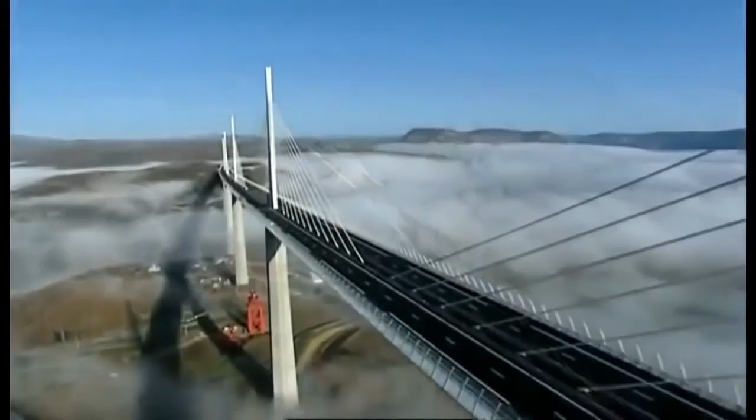This is the Millau Viaduct, the tallest bridge in the world. Its highest tower stretches a staggering 343 meters. So high, the bridge glides above the clouds. But this is a megastructure they said couldn't be built. When I've shown first the drawing of this bridge, they really thought I was crazy.

The team attempting to build this amazing freeway in the sky had to survive landslides, fight winds gusting at 130 kilometers an hour, and weather massive storms as the bridge simply hung in the balance. It's a bridge that pushes the boundaries of engineering to the limits, and then beyond.

Imagine building a series of Eiffel Towers, then slinging a 4-lane highway between them, all the way across one of the deepest valleys in France. Impossible though it sounds, that pretty much describes the building of the Millau Viaduct.

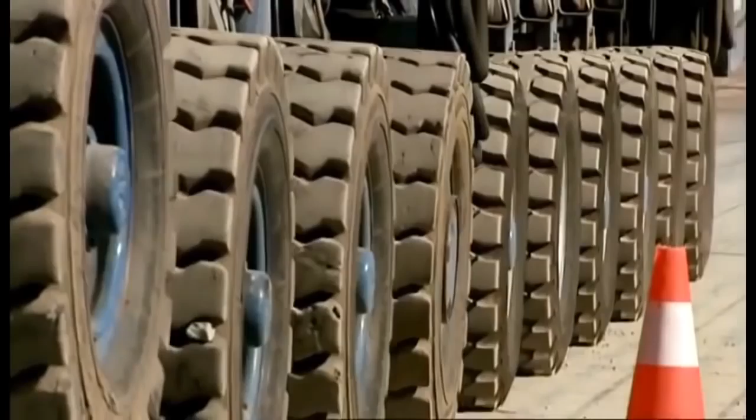From the start, the construction team faced 3 daunting challenges. 1. Build the tallest bridge piers in the world. 2. Put a 36,000-ton freeway on top of them. And 3. Erect 7 steel pylons, each weighing 700 tons.

And what's more, they had to do this hundreds of meters above solid ground. So high that if you were on top of the Eiffel Tower, you'd still be looking up at this awesome bridge.

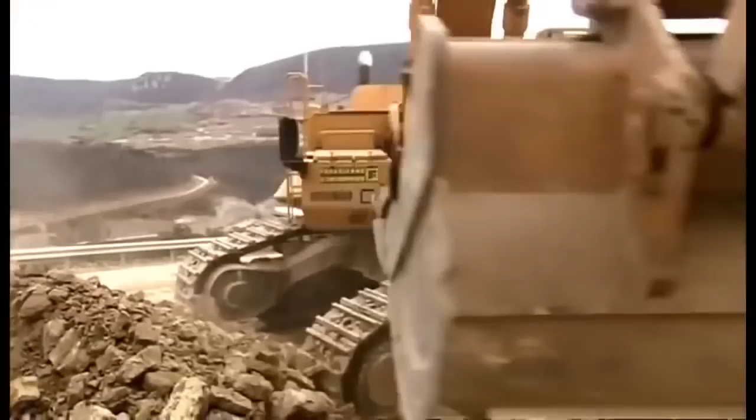October 2001, the team break ground. They're required to build a bridge that'll last for 120 years. And to win the contract, the teams promised to build it in record time, less than 4 years. By comparison, the world's longest suspension bridge, the Akashi Kaikyo in Japan, took a full 10 years to build.

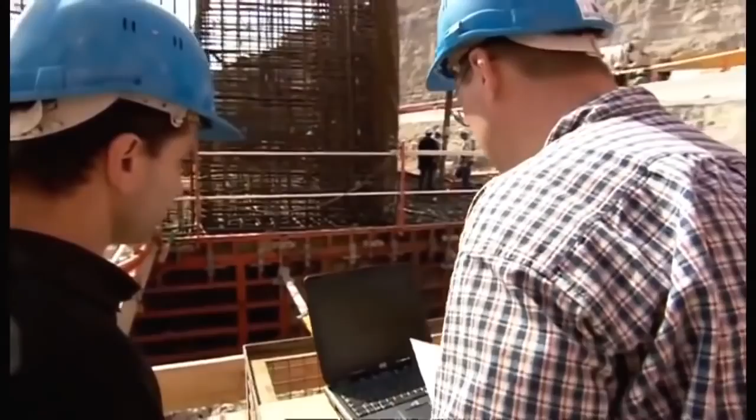To up the ante, any delay will cost them $30,000 a day in penalties. There are 7 piers that are numbered from the northern end of the valley. Number 1 will pose problems because of the steep slope. Number 2 will be the biggest challenge since it's the tallest. Crossing the river, number 3 is not much shorter. Then 4, 5, 6, and 7 climb the gentler slope to the south.

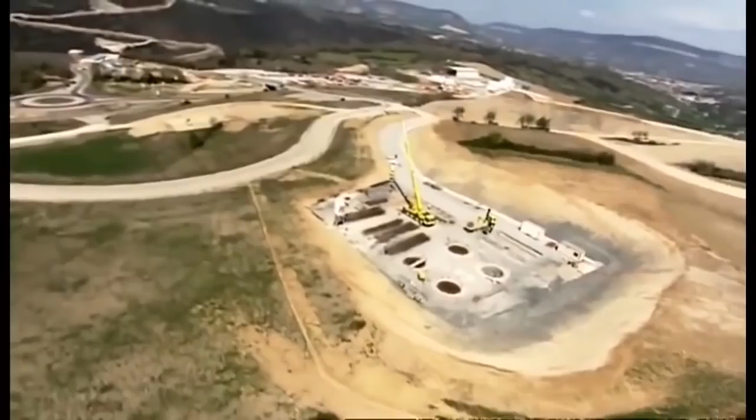To begin, the team had to bury the foundations deep in the bedrock in order to support the enormous weight the bridge will place on them. But the forces of nature were stacked against them. Geologists have warned of the risks posed by the region's fractured limestone. The rock is full of cavities that are essential to the local cheese economy.

These cave systems, close to Millau, are home to a unique bacteria responsible for the blue mold in the world-famous Roquefort cheese. But what's perfect for cheese could be disastrous for a megastructure. The geologist's diagnosis spelt one thing: landslides. This kind of catastrophe could jeopardize the entire project. Despite the warnings, building went ahead as planned.

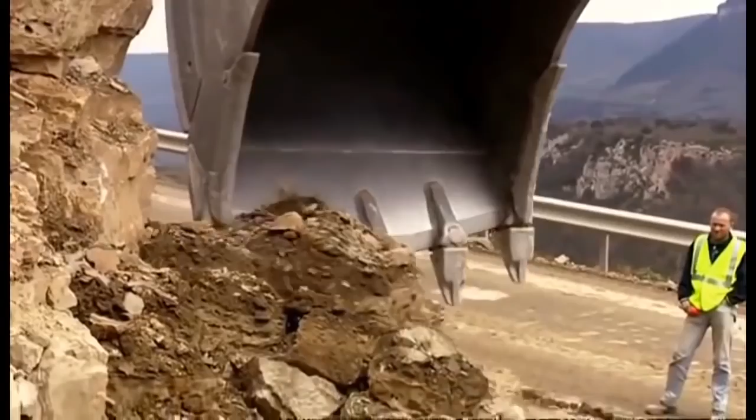Then, well into construction, as predicted, a dramatic storm causes a landslide. 4,000 cubic meters of rock collapse around Pier 1. Fortunately, the fallen rock doesn't damage the pier, but the warning is clear. They're forced to divert precious manpower and equipment to stabilize the slope and prevent a repeat collapse.

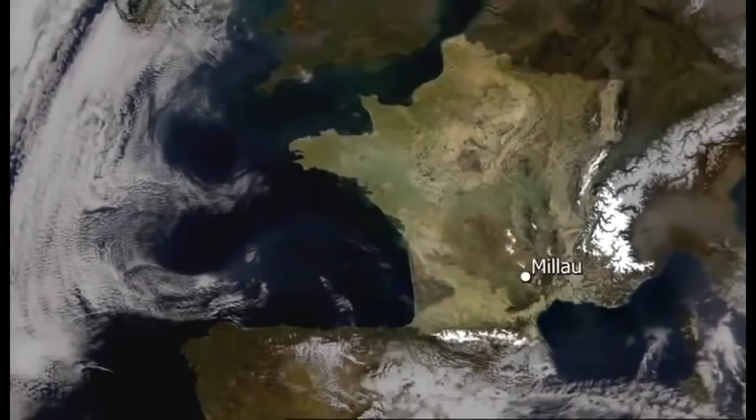So if the area is prone to landslides, why did they build the world's tallest bridge here in the first place? The answer is simple. In the 1980s, France built a freeway linking Paris directly with Spain. This major artery headed south across the French countryside, while from the Mediterranean, the freeway headed north, until they both hit one of the deepest valleys in France and stopped dead.

Welcome to Millau, France's least favorite bottleneck. The town of Millau is in the mountainous region of the Massif Central, one of the most tranquil parts of France. But in summer, this poor medieval town suffered traffic hell. The locals couldn't take it anymore. Neither could their mayor.

It was terrible for our reputation. When you hear every day on the television and radio, avoid Millau, there's a traffic backup, a 5-hour wait in Millau. And it's not just the people of Millau.

Two drivers, Jamila and Jemima, crossing the 30-odd kilometers between the freeway on either side of Millau, reveal exactly why this bridge is needed. Jamila, in car 33, will cross the new bridge, while in car 22, Jemima will take the old road across the valley floor.

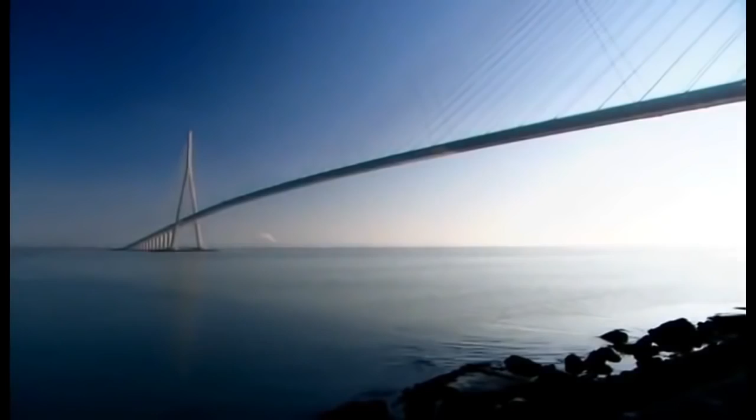It's clear exactly why the bridge was needed, but it took the French government a very long time to get round to building it. 12 years before construction began up in Paris, the Ministry of Transport first came up with a plan. Their head bridge builder, Michel Virlogeux, is no ordinary engineer. He's a man who thinks big, very big, like the Normandy Bridge in northern France, the longest cable-stayed span in the world.

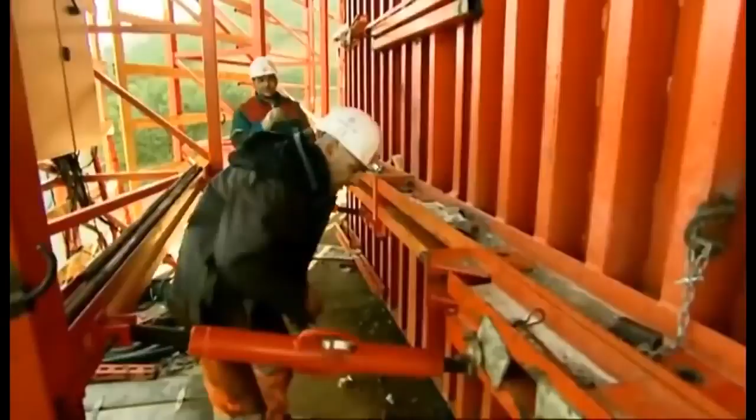With this record-breaking structure completed, Virlogeux was on to his next, Millau. His plan, another cable-stay bridge, but pushing the technology beyond anything previously attempted, with piers 4 times higher than the Normandy Bridge. The Millau Bridge would not only be the world's tallest, it would be unlike any bridge ever constructed. When I've shown first the drawing of this bridge to the competent authorities, they really thought I was crazy.

Virlogeux's Normandy Bridge has 2 sets of cables supporting the deck. But he wanted to up the stakes for Millau by losing 1 row of cables, so the remaining line would be forced to do twice the work. More dramatically, the 2.5-kilometer Millau Bridge, instead of having a single main span, needed a whole series of piers to support it across the valley. No bridge builders had ever attempted a multiple-span, single-line cable-stay bridge on this scale before.

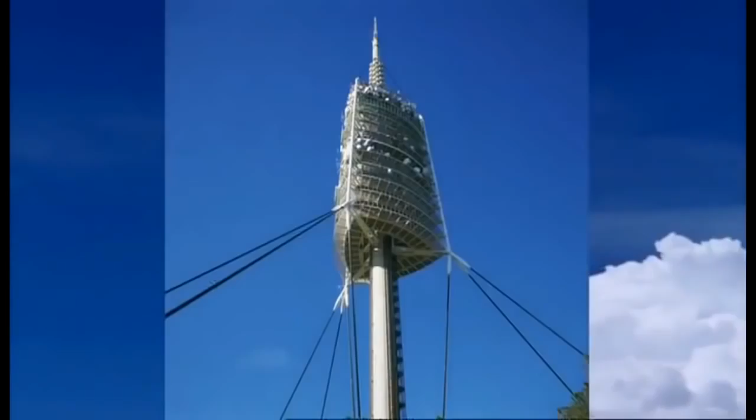The French authorities had a problem. Nervous about Virlogeux's groundbreaking scheme, they held a competition inviting other engineers and architects to compete with different designs. The winner, Lord Norman Foster, is one of the world's superstar architects. In Hong Kong, he built the world's largest airport terminal. In Barcelona, offices literally hang from a mast on his communications tower. This is a man who regularly contemplates the impossible and delivers. You know, it's the challenges, and it's one challenge on top of another, on top of another.

And with Millau, one of the biggest challenges was making it fit into the landscape, given it's just down the road from the famous Gorges du Tarn, France's equivalent of the Grand Canyon. How do you make something which has to be so immensely strong against the forces of nature look very gentle, very delicate? How do you weave something on that scale into the most unbelievable landscape?

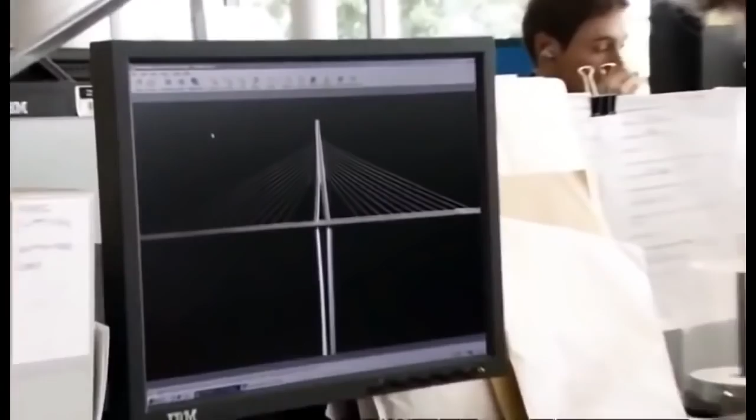Ironically, Foster's answer was to take Virlogeux's pioneering scheme, then push it one stage further. He turned an elegant piece of engineering into a delicate work of art by boldly cutting out 2 of the 9 original piers and seriously slimming down the remaining piers and road deck. Foster wanted the bridge to appear as delicate as a butterfly, but this butterfly has to support the weight of 5 Eiffel Towers in gale-force winds hundreds of meters above the River Tarn. Getting the design wrong would be a disaster.

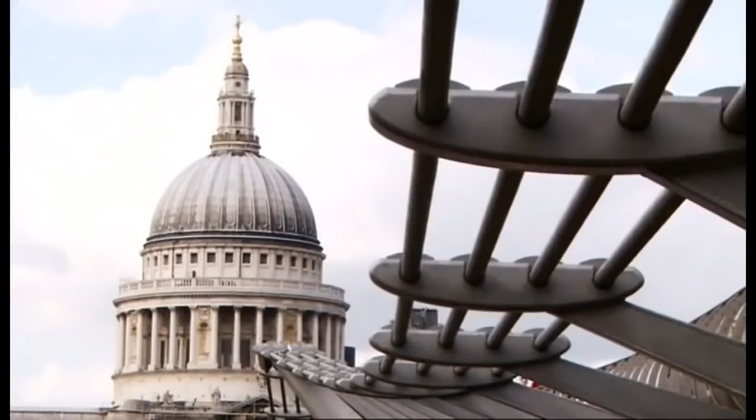Then, with Millau still on the drawing board, Foster's record as a bridge builder suffered a major setback. His Millennium Bridge in London is actually another record-breaking structure, the lowest profile suspension bridge in the world. But when this footbridge opened to the public in June 2000, it was a public relations disaster. Crowds walking over it set up a resonant frequency, and the bridge began to sway. As people adjusted their step to the small initial wobble, the effect was magnified.

Though it didn't threaten the structure, the swinging motion became so dramatic, the authorities closed the bridge for a refit that took 1.5 years and ended up costing over $8 million. It was a bad omen for the Millau Bridge, where construction was soon to begin. And at 15 times the height, a design flaw would be a catastrophe.

December 2001, France's Millau Viaduct, the tallest bridge in the world, is under construction. Everything about this project is supersized. It'll need 200,000 tons of concrete, so much that the team have to build a concrete factory on site. But there's nothing straightforward about this concrete. The formula must be just right.

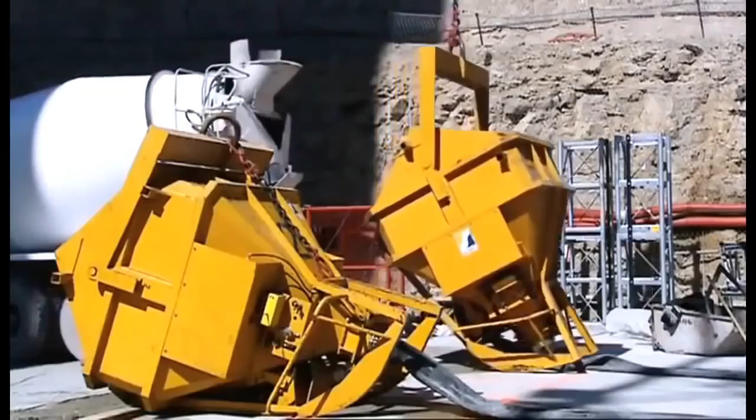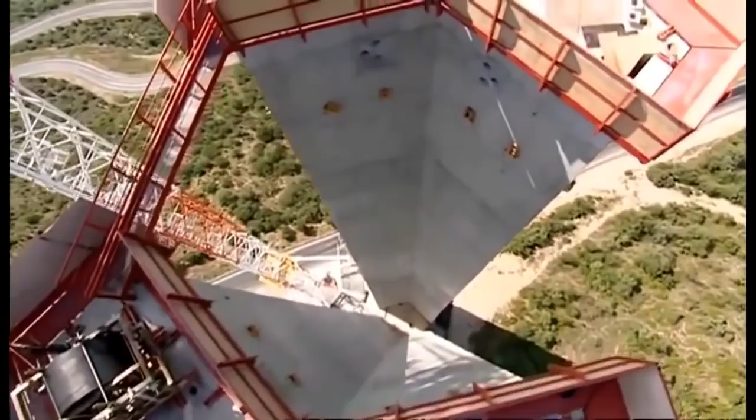It needs structural strength to support the massive loads it'll have to bear. But it can't set too quickly, as it has to be hoisted into position and poured hundreds of meters in the air. And it needs to be just the right color to suit Norman Foster's vision. In fact, the architect's vision has created a headache for the construction team. He's designed each pier as a complicated geometric shape, tapering the entire way up with vertical grooves set into them to create shadows. But what's just a line on paper for the architect was a major challenge to build.

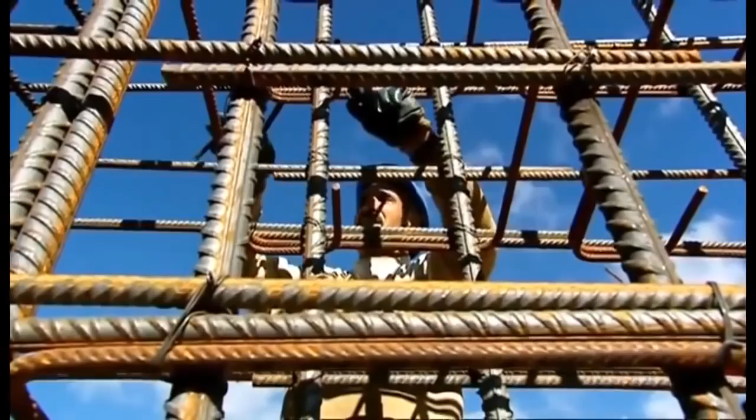The enormous piers are built step by step by pouring concrete into a temporary mold. To give the required strength, the molds are filled with a frame of steel reinforcing bars. In total, 16,000 tons of these steel bars are hoisted into place and secured. Laid end to end, they'd stretch the 4,000 kilometers from Millau all the way to Central Africa.

The shape of each pier is seriously complicated. As a result, each time they remove the sections of red steel shuttering, they have to change the shape of the mold to fit the profile of the next 4-meter section. Manhandling these steel panels weighing up to 15 tons apiece is no picnic. And with the combined height of the 7 piers totaling well over 1 kilometer, they have to change the shape of the mold over 250 times.

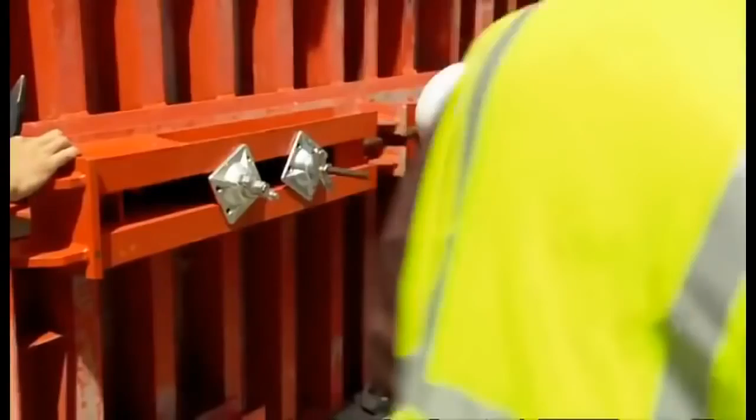Every 3 days, each team on each pier went through this whole cycle. Then they repeated the process. But it was a race against time, with a permanent threat of delay. Keeping the entire build on time and to budget was the daunting responsibility of one man, Jean-Pierre Martin. If instead of 3 days we took 4, imagine that multiplied by the number of castings. We'd end up with a 3 or 6 month delay. With a penalty of nearly $1 million a month, this isn't something Martin wanted to contemplate.

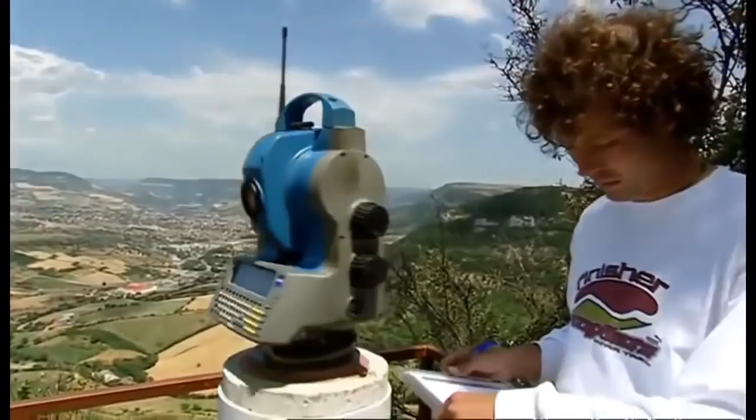And this schedule wasn't his only headache. You have to be pinpoint accurate when you're building the tallest bridge piers in the world. Get it wrong, and the bridge simply won't fit together. Just 10 centimeters out, about a hand's width on each 4-meter section, and the tallest pier could be 6 meters off at the top, the width of a jumbo jet fuselage.

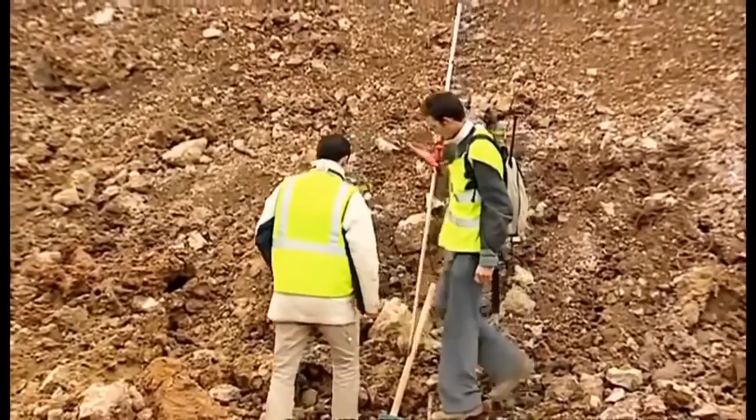Each team was aiming for a specific point in the sky. For Pier 2, this was exactly 245 meters above the ground, 546 meters from the north side, and 1,914 meters from the southern end. There was no room for error. The only chance they had to get it right was with GPS, accurate to within 4 millimeters. Using signals from multiple satellites, the team could pinpoint their position and make sure they're on target for that critical point in the sky they needed to hit.

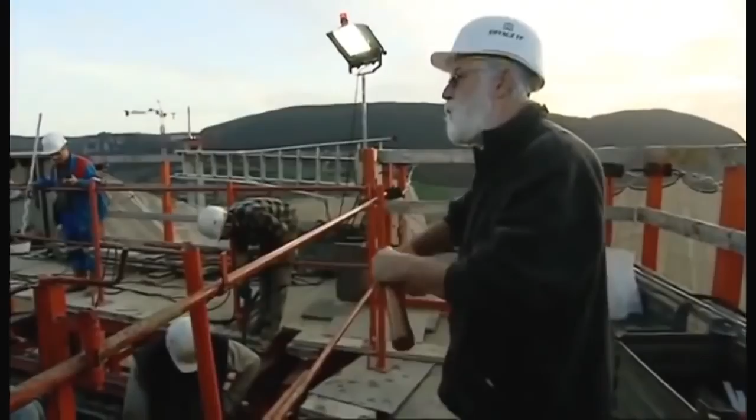Month after month, the piers climbed higher. Finally, by November 2003, they reached their full height. At 245 meters, Pier 2 becomes the highest bridge pier in the world. But is this record-breaking pillar where it's supposed to be? Amazingly, it's dead on target, to within 2 centimeters. Champagne corks pop. It's time for a major celebration. Against all the odds, they were 1 month ahead of schedule, but the team couldn't afford to relax. The next stage of the project would be the most difficult part of the build.

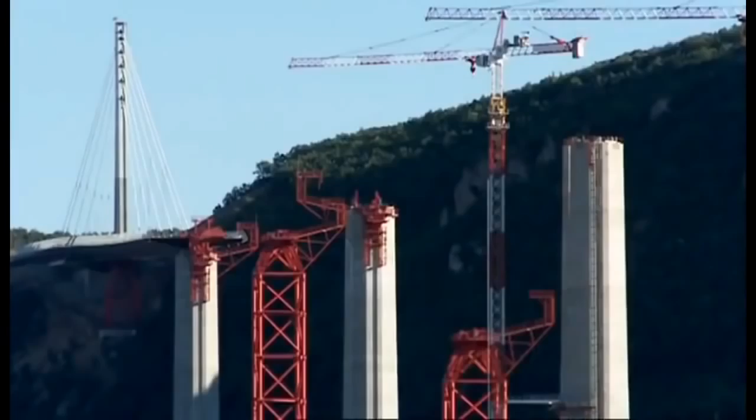Phase 2 of building the world's tallest bridge involved putting a 2.5-kilometer roadway weighing 36,000 tons on top of the piers, a full 270 meters above the River Tarn. Bridge builders know danger comes with the territory, but working at these heights can be lethal. More than 34 died constructing New York's Brooklyn Bridge. 35 died in 1970 on the Westgate Bridge in Melbourne, Australia. And 1 year later, 13 workers were killed when the Koblenz Bridge in Germany collapsed into the Rhine.

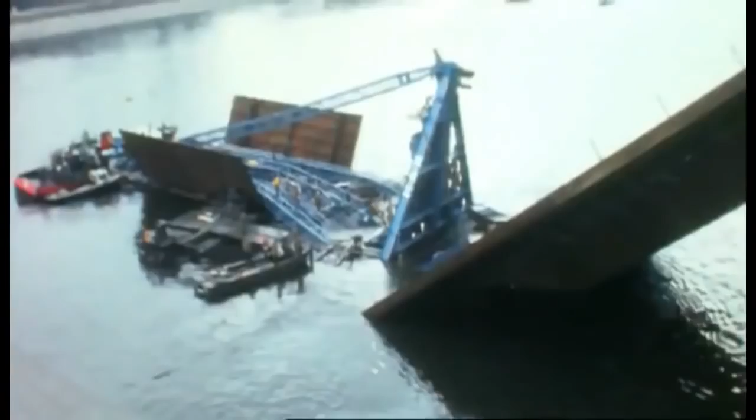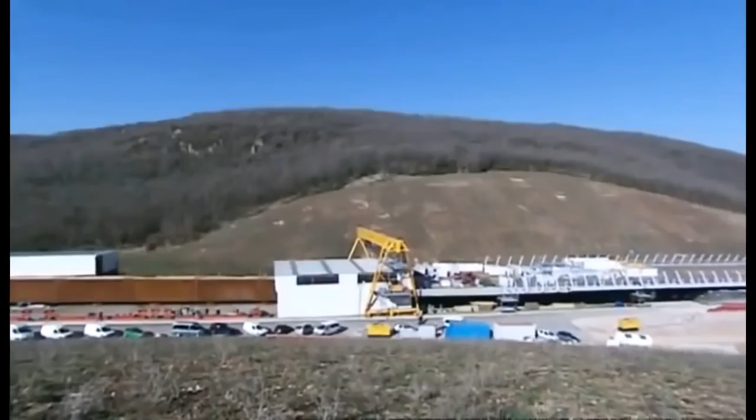With these fatalities in mind, the team decided to fabricate the entire road deck on the safety of solid ground. This meant building it in steel, which in theory would be much safer than lifting vast concrete sections hundreds of meters into position. There's only one problem with this plan. No one had ever put a road deck on piers anything like this height before, let alone over a 2.5-kilometer span.

In the end, only one steel manufacturer had the courage to take on this colossal challenge. Eiffel, the steel firm set up by the great French engineer. Eiffel built what was once the tallest bridge in the world, the Garabit Viaduct in southern France, before getting round to the framing for New York's Statue of Liberty and, of course, his signature tower in Paris. But despite the company's experience, Eiffel's director, Marc Buonomo, knew he was taking a serious risk. It was a gamble for the company, because if there had been a mistake, if it hadn't worked, it would have been the whole company.

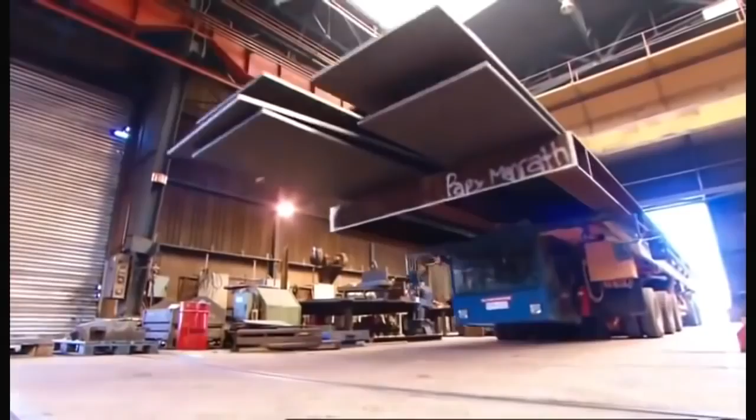They fabricated the massive sections that would make up the road deck in the company's steel factories. This immense jigsaw puzzle involved manufacturing 2,200 separate sections, weighing up to 90 tons and some of them 22 meters long. Their accuracy is measured with a laser to within a fraction of a millimeter.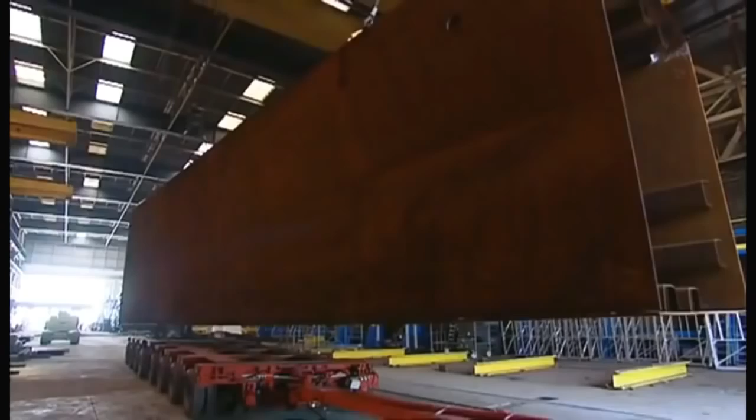The huge square tubes are the central spine that should make the deck rigid. The triangular side panels will be welded on either side to create the width for a 4-lane highway. To meet the punishing schedule, Buonomo automated the manufacturing with a 2-headed welding robot and a plasma cutting machine.

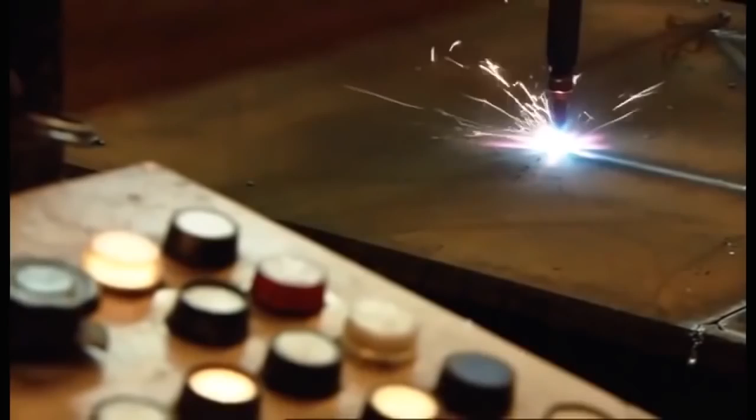Each cutting pattern or template is programmed into the computer. Then the machine automatically blazes its way through the steel. The torch reaches a scorching 28,000 degrees centigrade. That's 5 times the temperature of the Earth's inner core.

But cutting and welding was the easy part. The hard part was getting these monster sections the hundreds of kilometers from the factories to Millau. The routes had to be planned with precision to avoid major damage. The police coordinated safety and clearances. Even with that level of preparation, some obstacles felt as if they're cutting it just too close for comfort.

And this was no one-off event. To build the viaduct took over...

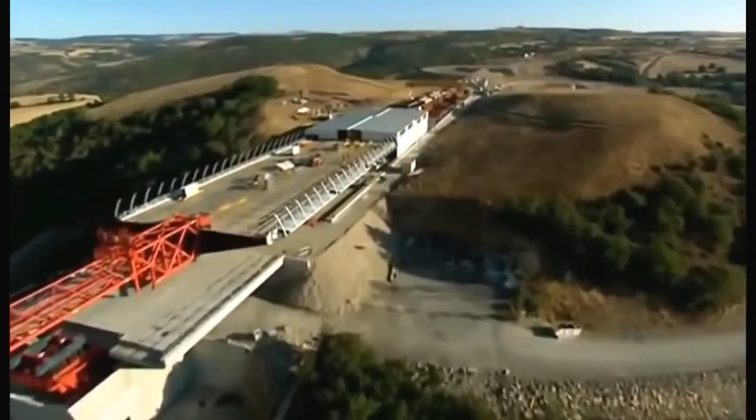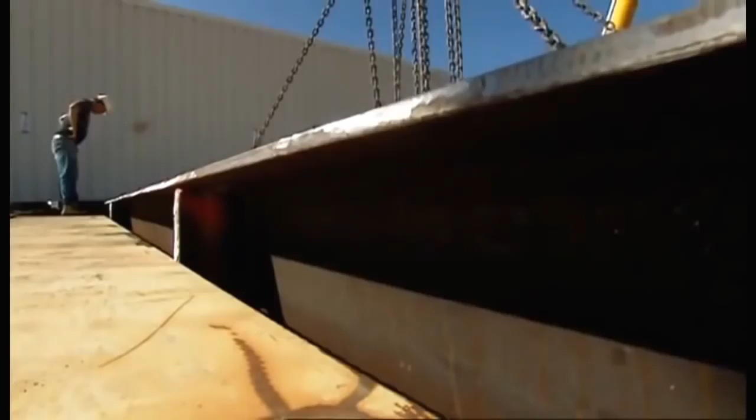Extraordinary road convoys. The components arrived at assembly plants set up, one on either side of the valley. Here, the pieces of a massive jigsaw puzzle were welded together to form the 2 halves of the deck. But getting these 2 halves to span the valley, on top of the world's tallest bridge piers, would be a major challenge. They'd be the first team to put a road deck on a pier taller than an 80-story skyscraper.

And pushing bridge building beyond anything attempted before, they planned to slide the entire 2.5-kilometer road deck over in 2 colossal pieces. The bridge's chief engineer, Jean-Marie Cremer, was one of the few people who believed it could be done. All the engineers who know this method, who were in the know, didn't believe it was possible. If the team had got their calculations wrong, the entire structure could collapse into the valley.

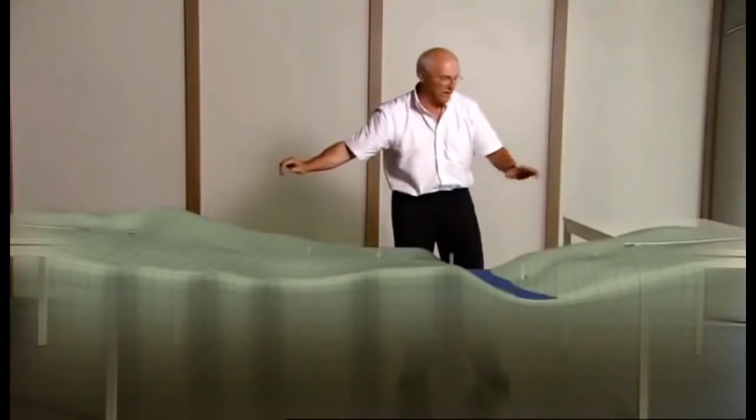We found a solution for the construction, which was to launch the bridge from the 2 sides. One part on the Larzac Plateau, one on the Rouge Plateau. And to push them from the 2 sides and to make them come and meet here above the River Tarn.

Smaller bridges use a similar technique. A powerful set of hydraulic rams literally pumps the deck from one side to the other. But Millau would be the longest launch ever attempted over the highest piers in the world, and the results could spell disaster. The deck is so slender, it would bend and collapse if it were pushed out over the 342-meter spans between each pier. The furthest anyone's previously managed is less than half that distance.

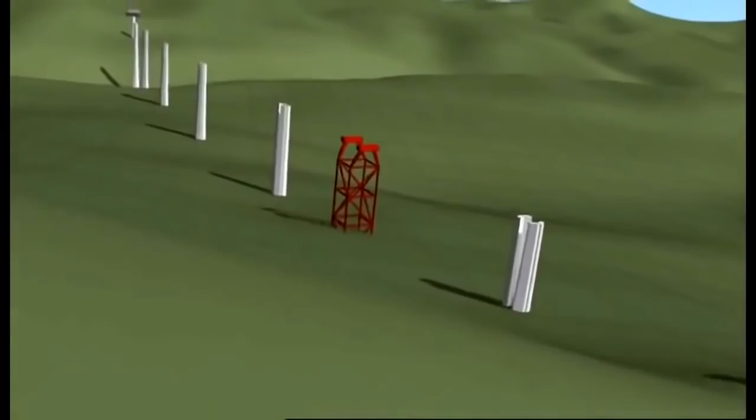The first part of the solution was simple. Fit a pylon so its cables support the front of the deck as it goes out over the valley. Then construct temporary steel support towers that halve the spans to a more manageable 171 meters. These steel towers were a construction feat in themselves. The largest, over 170 meters high, is the tallest ever built, and they needed to carry a massive load.

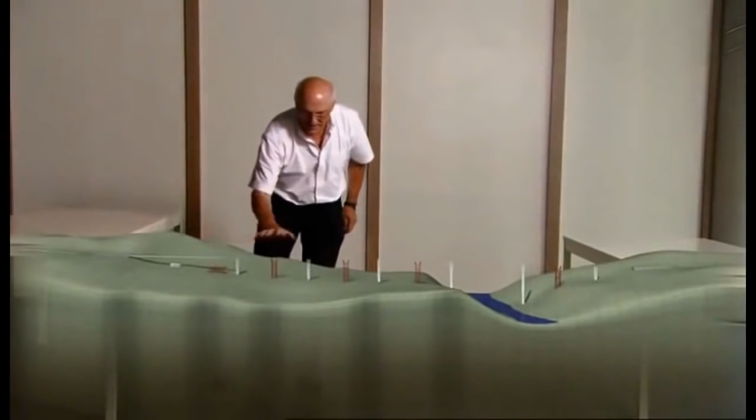7,000 tons as the leading edge of the deck, together with the first 90-meter pylon, slide over. And simply pushing this enormous weight over the top of the vulnerable piers would bring them crashing to the ground. This was the nightmare scenario. If we'd done a conventional launch, we would have knocked the piers over like the pins in a bowling alley.

Someone needed to reinvent the way this type of bridge is built. And it's Marc Buonomo with Jean-Marie Cremer who came up with the breakthrough. The basic principle can be demonstrated with a heavy box and a wobbly table.

With a normal launch, you knock over the piers. I want to advance the deck over the pier, but if I push the deck from here, I'd knock over the piers. Because they're so tall.

The idea is to install a launching system on top of the pier, and that way, if I push the deck, it has no effect on the stability of the piers, and the piers won't fall over. The trick is to use a series of these launching systems to jack up the deck and inch it forward.

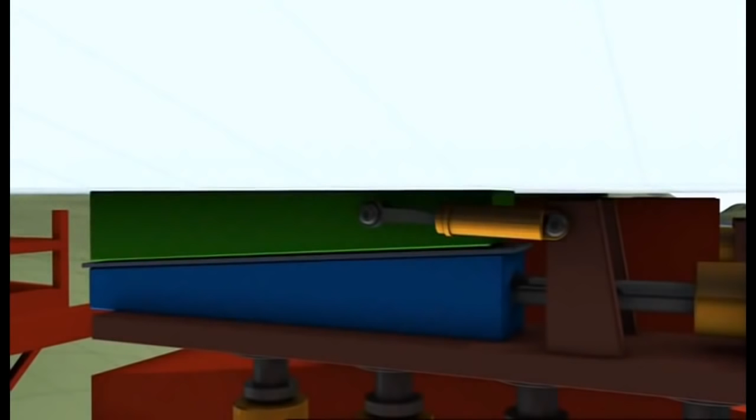Each system uses two wedge-shaped blocks under each side of the deck. The upper wedge is pulled forward by a hydraulic ram. It slides up the slope of the lower wedge at the same time, lifting the deck from its supports and advancing it 600 millimeters. The lower wedge then retracts, dropping the deck onto its supports. The upper wedge returns to its original position, and the whole cycle begins again.

4 of these clever devices are placed on each pier, all programmed to work at exactly the same time. The result is that together, they pick up the entire roadway and shunt it forward. But if one fails or gets out of step, it could spell disaster. The force could push the bridge piers apart till they collapse.

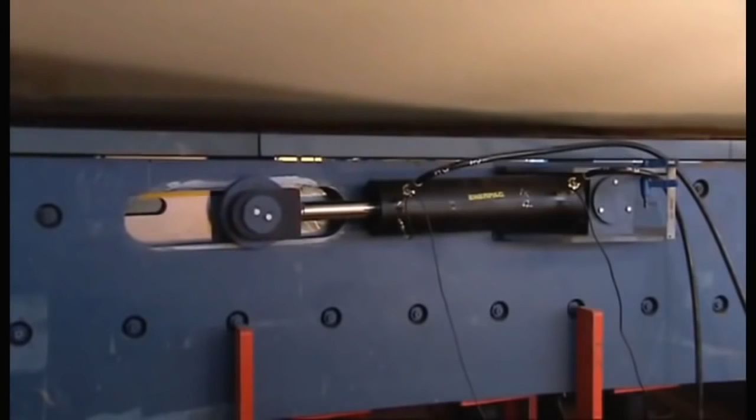When you're up there and you see Millau 300 meters below you, you ask yourself, was this a good idea? The future of the entire project was now hanging on a prototype, and it had never been tested.

It's the morning of February 26, 2003. Do or die day for the world's tallest bridge. Everything is about to be put to the test. The flexibility of the deck, the strength of the temporary piers, and critically, the pioneering hydraulic ram system. Even Boineau, the man in charge of the launch, had his doubts. As it had never been done before, I have to tell you, I had fears that it wouldn't work.

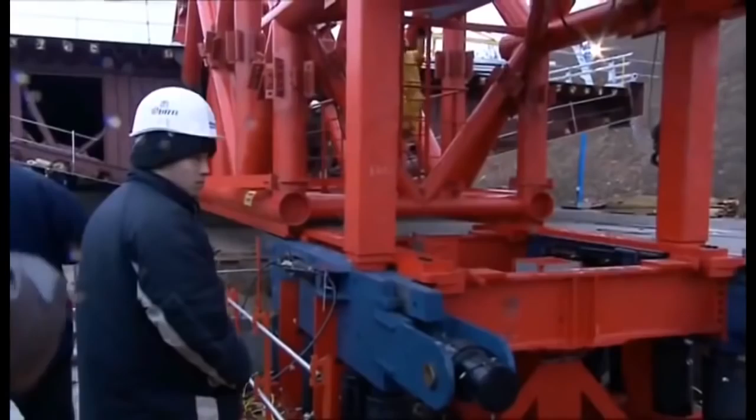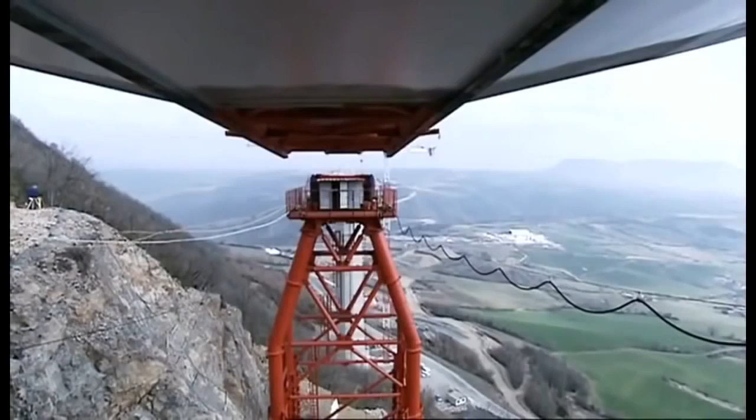The pumps kick in, the pistons start to push, and the deck begins its huge journey across the valley. The moment I heard the motors start, I put my finger on the deck, and I could feel my finger move. Every 4 minutes, the deck advanced 600 millimeters across the valley. Surveyors tracked its progress. But it was still a nail-biting time as they watched the unsupported deck crossing the void.

Eventually, the deck reached the safety of the first pier. 204 meters down, only 2,256 to go. The launching system seemed to be working as planned. The engineers were feeling optimistic. But as the deck advances into space, it'll become more vulnerable to the wind, which can reach 130 kilometers an hour.

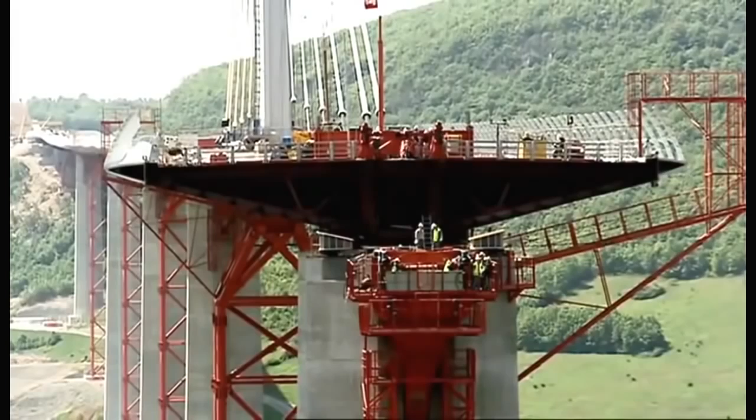Unfortunately, the road deck has the shape of an upside-down airplane wing, and the team's greatest fear is that this wing could simply take off. The engineers kept a close eye on the wind and weather conditions. When they were satisfied there was a 3-day weather window and the wind wouldn't exceed 85 kilometers an hour, they'd give the construction team the go-ahead, and the deck launch could continue. The reason for this precaution is simple. Strong winds can literally tear a bridge apart.

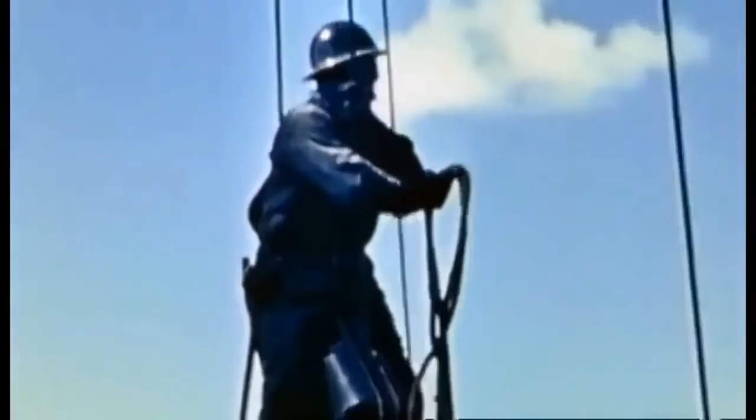In 1940, Washington State built a suspension bridge across the Tacoma Narrows in the U.S. Northwest. It opened with a grand ceremony on July the 1st. But the celebrations were short-lived. The bridge had a major problem: the wind. Girders beneath the deck, designed to make the bridge rigid, actually blocked the wind, causing the roadway to ripple alarmingly. Locals soon dubbed it Galloping Gertie.

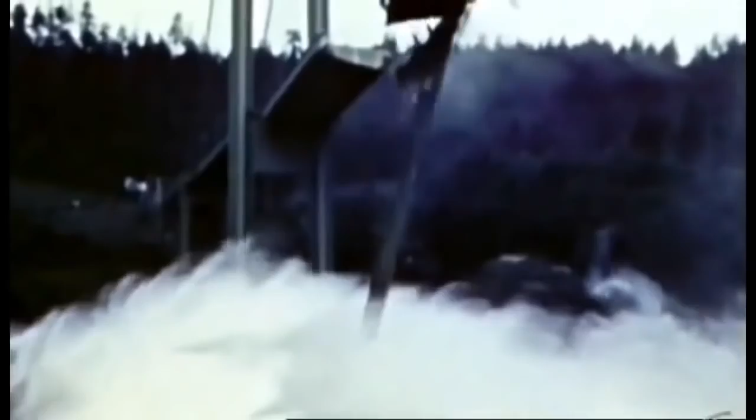On the 7th of November, with the wind less than 70 kilometers an hour, the bridge begins to twist violently. At 11 a.m., time runs out for Galloping Gertie. The wind sends the bridge crashing into the river. Wind tunnel testing is now standard procedure as a direct result of Galloping Gertie.

For the Millau Bridge, they analyzed the wind in the Tarn Valley over 18 months, then recreated those conditions in the wind tunnel. Wind engineer Olivier Flamand was shocked by the results. The average wind speed was relatively low, but because there's such strong turbulence, it created very fast peak winds. The rugged terrain creates serious turbulence at the height of the road deck. Winds peak at 130 kilometers per hour. That's hurricane force.

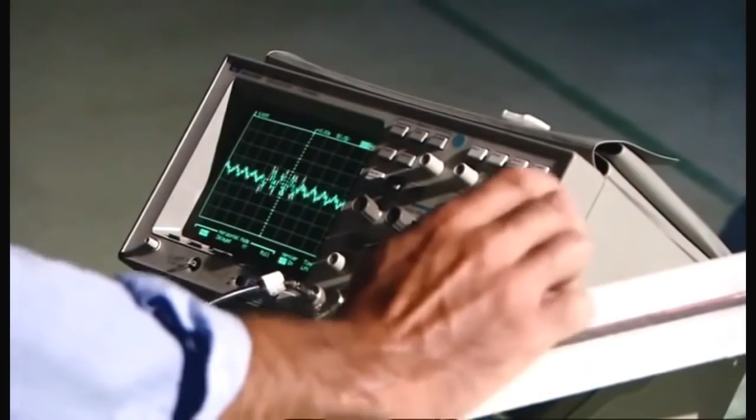They tested every aspect of the bridge to analyze the risks: piers, pylons, and critically, the deck. But it's not just the aerodynamics of the finished bridge. They needed to find out how it would behave when it was most at risk, during the launching of the deck.

Olivier and his team reached a chilling conclusion. The winds they've measured are strong enough to blow the unsecured deck off its supports and send it crashing hundreds of feet to the valley floor.

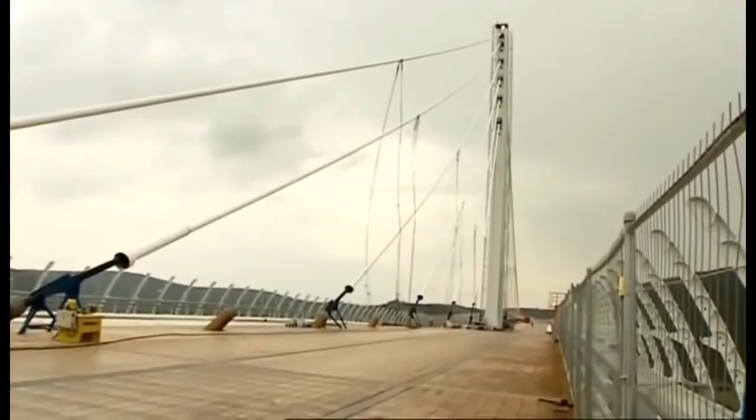And then the nightmare began. On the 22nd of August 2003, 6 months into the deck launch, one of the launch systems failed, leaving the deck hanging in the wind. To make matters worse, the weathermen were predicting storms.

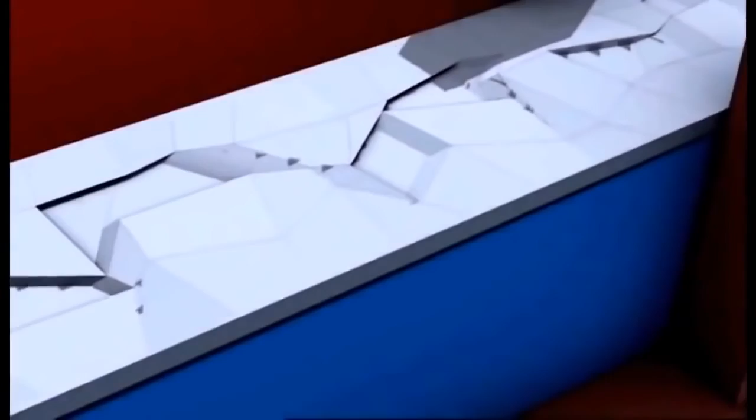So far, these massive pushing machines had worked perfectly. But the fact is they were prototypes, and due to the frantic schedule, they'd never been tested. The problem was that the non-stick Teflon between the sliding surfaces had ripped, and the friction generated was too much for the hydraulic rams to push against.

Unfortunately, no one had planned on replacing parts of this monster machine mid-launch on the top of a massive concrete pillar. This was very bad news for the man who staked his reputation on this system. It was maximum stress, like poison in your mouth. You don't forget that.

Re-examining their calculations, they realized the cause of the problem. It underestimated the forces between sliding surfaces, but they wouldn't be able to repair it without the necessary spare parts. The clock was ticking, and Marc Buonomo needed a solution fast. When Apollo 13 came back with that incident, the NASA engineers requested they did the inventory of everything there was on board to know how to fix it.

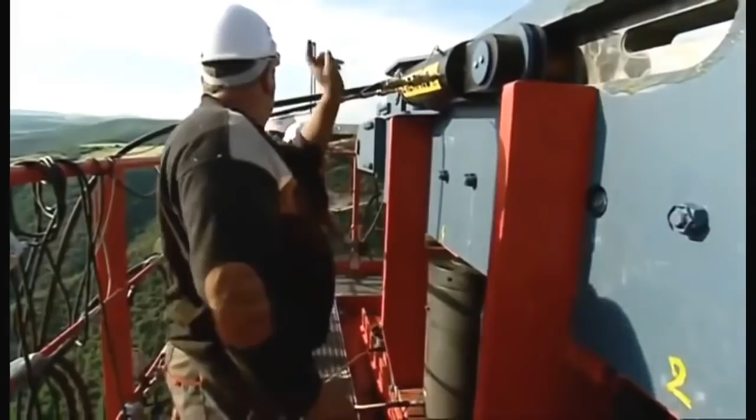The Millau team did an inventory. They realized that the other launching machines, not yet being used, could be stripped to provide the new Teflon surfaces they needed. Working all through the night, the team extended the access platform. This allowed them to take out the 5-meter-long, 2-ton steel wedges, replace the Teflon, and reassemble the launching machine. By 8 a.m. the next morning, it was ready to resume the launch.

The rest of the week, the predicted storms arrived, and another set of launching machines wore out. So when the deck finally made it to the safety of the next pier, the team breathed a major sigh of relief. You don't forget that. I won't forget that. For 4 hours, I was really scared.

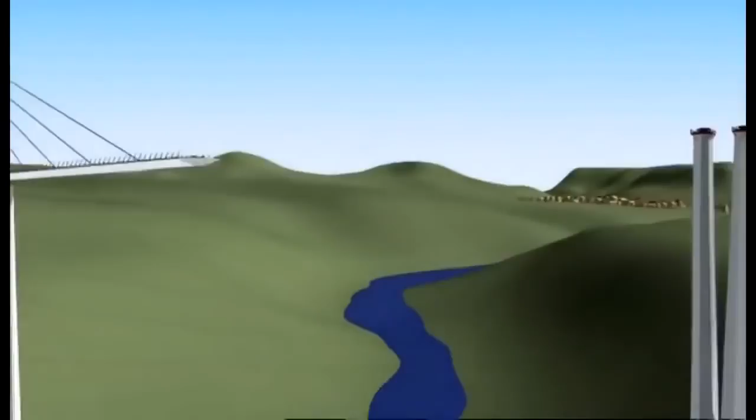The two decks continued their journey across the valley, day after day, week after week for a full 14 months. They approached each other, millimeter by millimeter. By May 2004, they'd reached a critical phase. From the northern end, the shorter deck had traveled 717 meters into space to reach its final resting place. From the south, the longer deck extended over 1.5 kilometers. Only the section over the river, the one point where it was impossible to erect a temporary pier, divided them.

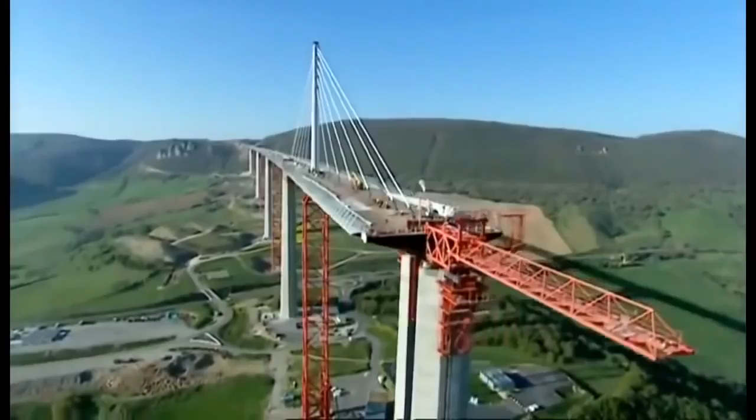If they've got their calculations wrong, they'll have built the biggest white elephant in Europe. Even the man behind the whole project had his doubts. I was not convinced at all that the two parts of the deck could meet exactly with a perfect geometry. The odds were against them. Calculating such a feat so precisely is a Herculean task.

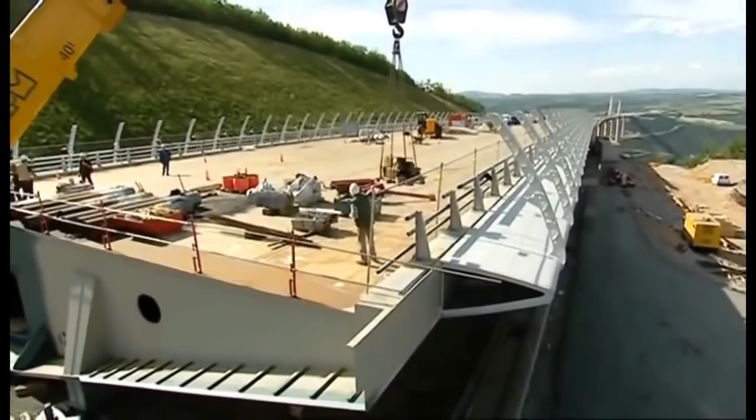Firstly, the two starting points on the northern and southern slopes of the valley are at different heights. Secondly, the bridge has a subtle curve to it. As a result, each steel panel which makes up the road deck had to be cut and welded with extreme precision. It would be an engineering triumph if they got these two sloping curved decks to meet as required.

The team checked the weather reports. With the wind inside safety limits, they gave the go-ahead for the final push. The rams began to drive the deck's leading edge off the safety of Pier 3 towards its destination. At this point, a total of 21 launching systems needed to move at exactly the same moment to avoid disaster. If anything were to go wrong now, the man responsible would be Marc Buonomo.

Everyone asked me, how can you be sure that it will go straight? So to be sure that they were going to the right place, I had a GPS put on the front, so I could see the gap between the theoretical and the real position.

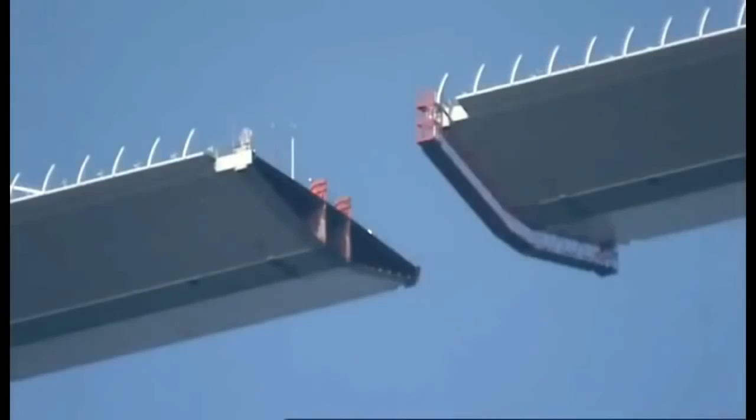Over the next 2 days and nights, the deck advances 600 millimeters at a time towards its final resting place. The world's media are watching the critical meeting of the decks. And to add to the pressure, the French Prime Minister is due to drop in to celebrate the event. The deck pushes forward. Now, with only centimeters separating the two sections, a magnum of champagne is hung between them to mark the moment.

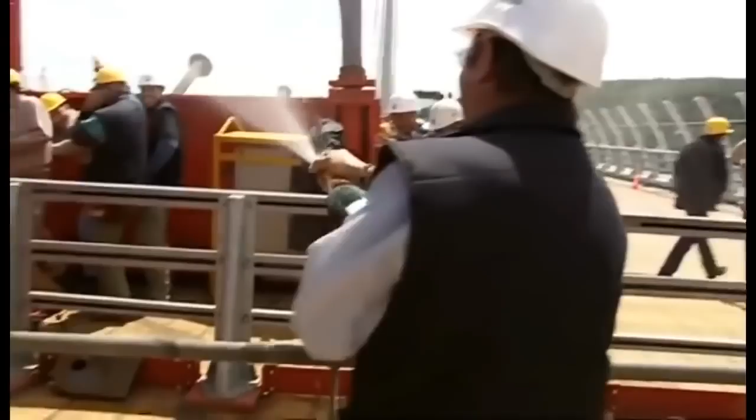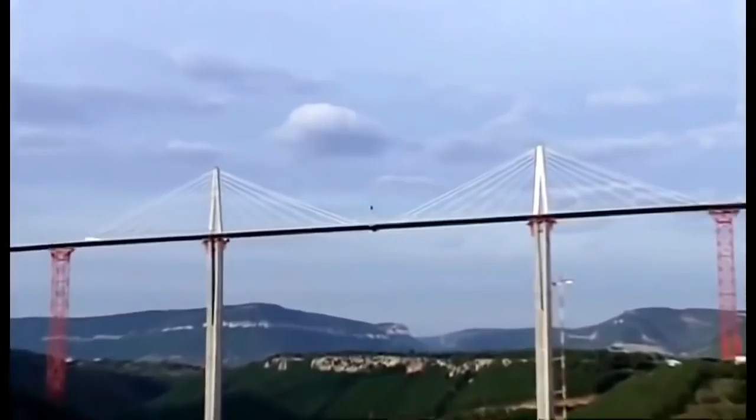At last, union. The two massive steel decks have traveled high over this valley, a total of 2.5 kilometers, and when they check, they're aligned to within 1 centimeter. That's accurate to within 99.9999%. All the measuring, all the calculations have paid off. They've nailed it.

The meeting of the decks was a special moment. News reports traveled round the world, and in Salzburg, Austria, they reached Felix Baumgartner, aka Felix the Conqueror. Felix has made a career base jumping from some of the tallest structures on the planet, and within 24 hours, he'd driven to Millau and was calculating the logistics for the jump, factoring in his two main aims: to avoid arrest and death.

Baumgartner waited for darkness before arriving on site. He found his way to the base of Pier 2, then climbed an access ladder the full 245 meters to the top. He entered the steel road deck and found a place to hide until daybreak. He had to remain concealed until the sun was high enough for his cameramen to record his world record attempt.

At 7 a.m. the following morning, Felix the Conqueror emerged. He took a cool backward flip off the tallest bridge in the world and entered the record books. The tallest bridge in the world, 250 meters. I did it. And having evaded death, he made sure he's not caught by the police.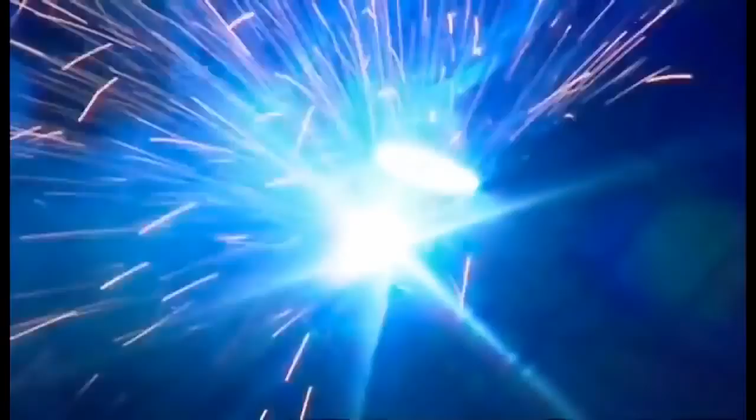The decks have been joined, and the team have reached the final phase of the project. But there was still a race to meet the schedule, and their problems weren't over yet. Everyone could see the dramatic undulations in the flexible steel deck. Even some hardened bridge builders wondered about its structural integrity. It was a huge surprise for everyone. All the engineers said, we knew steel was flexible, but not that flexible.

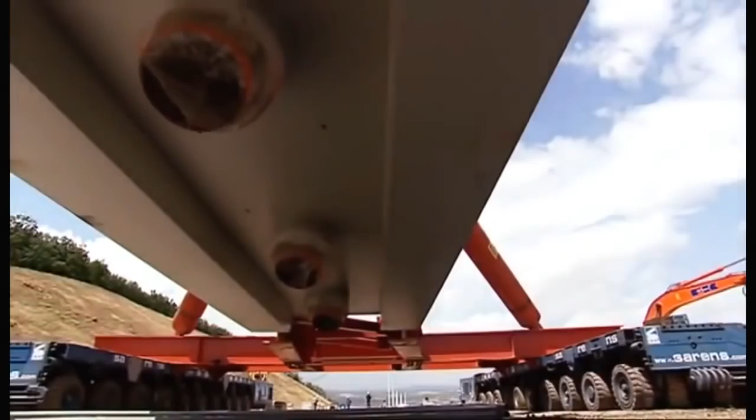The team were relying on the pylons and cables to pull the deck straight. Each massive pylon is 90 meters high and weighs 700 tons, the equivalent of 85 London buses. Placing them in position on the slender deck, high above the valley floor, would go beyond anything ever attempted. Once again, Marc Buonomo had a plan. You know, the first people to make vertical pylons were the Egyptians. Buonomo adapted a technique used in ancient Egypt to erect obelisks in the sands.

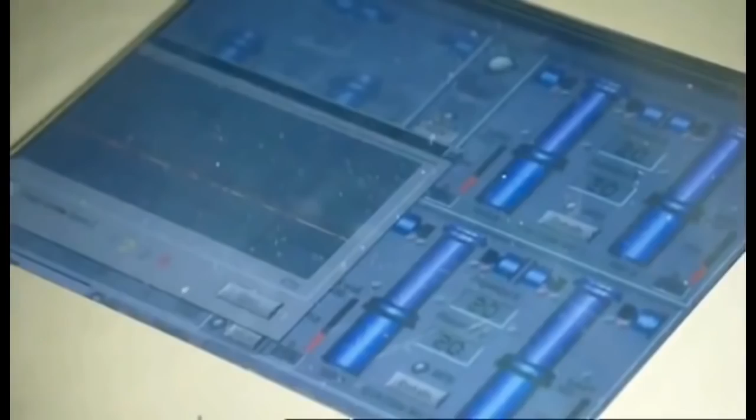On top of the road deck, the team put up two enormous steel towers, both of them secured by cables and equipped with a hydraulic system capable of raising 1,000 tons. The 700-ton pylon is then lifted by the hydraulics. As it rises, it pivots little by little until it's vertical. It's then lowered safely onto its anchorage point. Buonomo's 4,000-year-old technique worked to perfection.

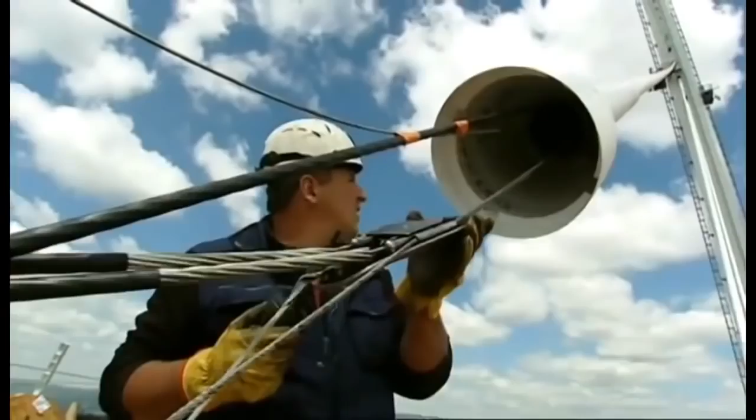With all 7 pylons in place, the team could attach the cable stays that would straighten the rippling deck and give it the strength to cope with full traffic loads. They hoped. The weight of the roadway is now over 40,000 tons, the equivalent of a cruise ship, and the 154 cable stays should prevent it from sagging or collapsing. The strongest stays are made up of 91 individual steel strands and have a breaking strength of 2,500 tons, strong enough to hold back 25 jumbo jets, all at full throttle.

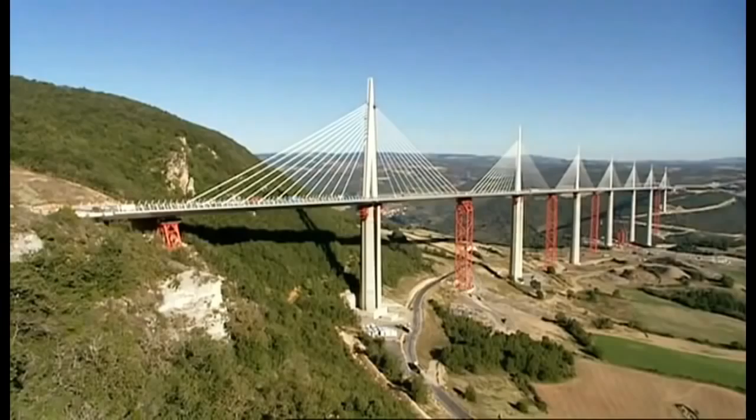As the cable stays are tensioned, true to plan, the ripples in the road deck are pulled straight. Over the 2.5-kilometer deck, the ripples are now no larger than the size of a thumb. They're finally on the home straight. The road surface goes on, adding a further 10,000 tons to the load. That's like driving 153 battle tanks onto the deck. But before it could open to the public, the team needed to know the bridge is safe. It would have to pass one crucial test.

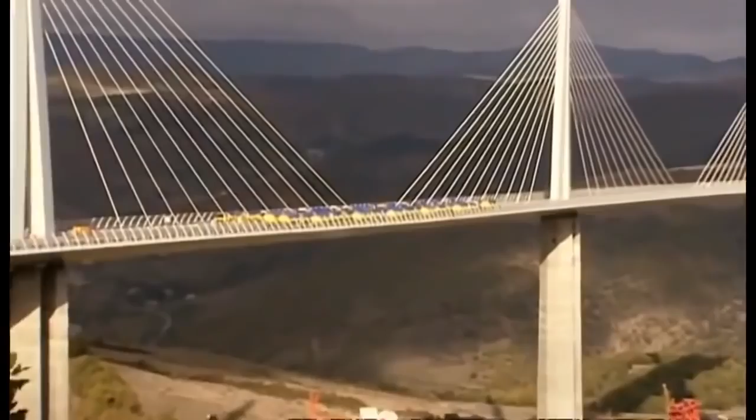After 3 years, the construction team building France's Millau Viaduct, the world's tallest bridge, are about to find out if they got their calculations right. On a single-span cable-stay bridge like the Normandy Bridge, a large load on the main section is no problem because the cables are attached to solid ground and can't give.

On the Millau Viaduct, with its 8 spans, the cables are attached to the deck of the adjacent sections. A load on one section will cause it to drop, pulling the stays down. As the pylons lean in, the matching stays are pulled upwards, lifting the neighboring decks and causing a dangerous rippling effect.

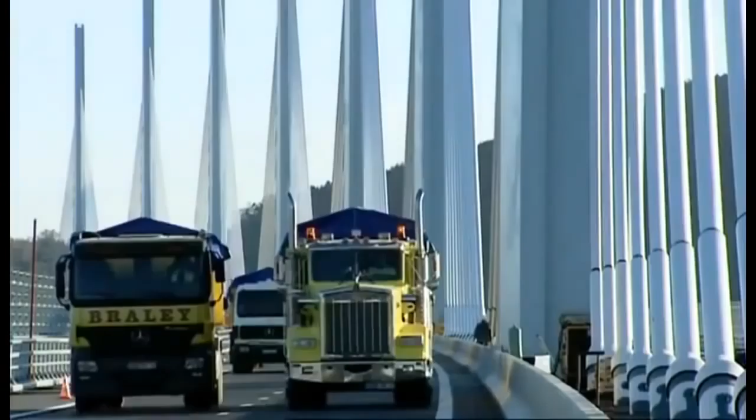It's right now the team put their bridge to the test. These 28 trucks have a combined weight of over 900 tons. They are now positioned in the critical point, mid-span. The engineers hold their breath. Measurements are taken. The span bends just 26 centimeters. This is a triumph for the engineers. The bridge was designed to cope with more than double that.

4 weeks later, on December the 14th, 2004, President Jacques Chirac officially opened the Millau Bridge. A proud moment for the whole of France. Just over 3 years of construction have produced the tallest bridge in the world, designed to last at least 120 years. And against the odds, the project manager even brought the job in on time. But that's not what he's most proud about. What I remember, because on construction sites there are often accidents, is that we had no serious accidents, nothing more than a minor injury.

As soon as it opened to the public, the bridge was an instant success. But the real test isn't till its first summer, when the French all take their annual vacation. No one ever expected anything like this. Numbers peaked at more than 50,000 vehicles a day. At over $7 per car, that's great news for the construction company, who are clawing back their $478 million investment in the project.

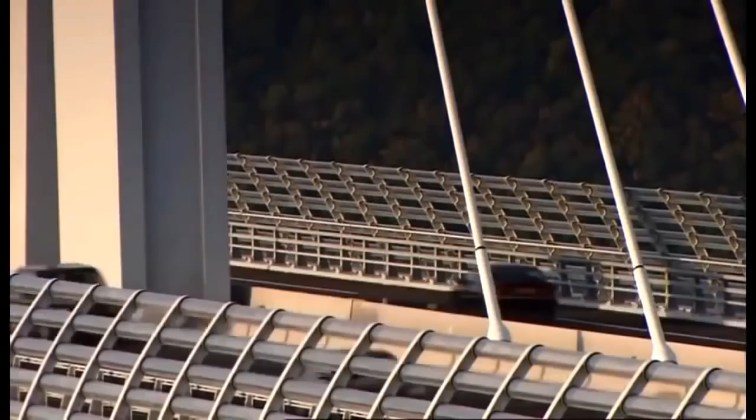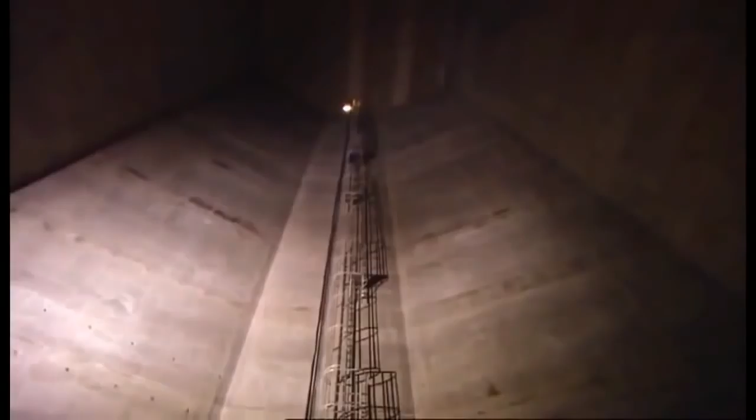This was an epic bridge to build, but it's just as epic to maintain. Thierry and Frank are assigned to P2, the world's tallest bridge pier. This structure is no solid concrete block. It's a series of vast hollow spaces. Their job today is to test the communication system and electric circuits on each of the 7 structural floors. This involves a 343-meter climb, going hand over hand up a ladder for the rest of the day. By dusk, when Thierry finally reaches the summit of the pylon, he may be exhausted, but there is a payoff. You get a fantastic view from here, a 360-degree panorama.

The tallest bridge in the world has become an icon. But this is creating problems no one had ever imagined. Locals have been taking over the bridge as a platform to get media attention for their causes. This crowd was hoping that driving sheep over this freeway in the sky would help them get more farming subsidies.

Jose's job is to prevent this kind of incident from creating a danger, and on this bridge, the incidents keep on happening. An alarm triggered by a motion detection system means there's a stopped vehicle on the bridge. Immediately, Jose dispatches a colleague to deal with the situation. The last thing anyone wants is a multi-car pile-up on a 2.5-kilometer bridge, quarter of a kilometer in the sky.

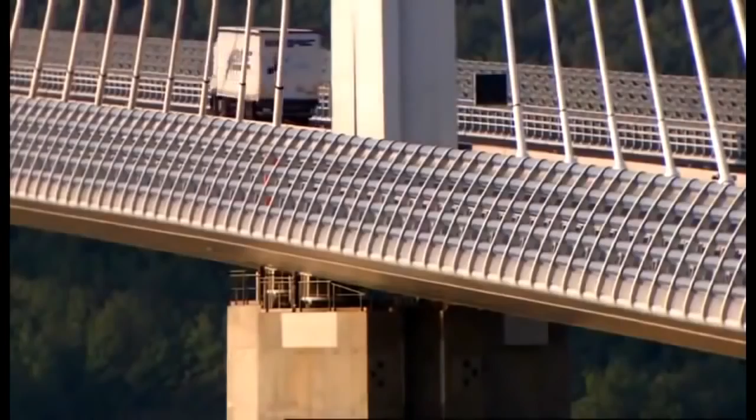Jose zooms in his camera to reveal the man has left his car and is sitting dangerously on the crash barrier. The driver's probably only broken down, but already one man who stopped climbed over the wind barrier and jumped to his death. Bruno intervenes. Thankfully, it's no more than an irresponsible photographer who's sent on his way.

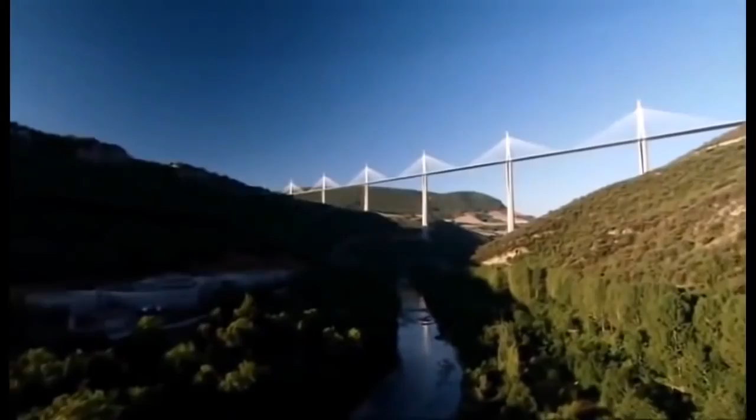You could say the Millau Bridge is a victim of its own success. It's definitely become a major tourist destination. 700,000 visitors in the first 9 months. Fortunately, most of them wait till they're off the bridge to take their photos. It's magnificent. I came 600 kilometers today to see the Millau Viaduct. There's only one thing to say. It's extraordinary. They're drawn because it's a world-beating structure, but also because it's incredibly beautiful, delicate, and minimal. Not what you'd expect from a structure that's nearly a third taller than any other bridge on the planet.

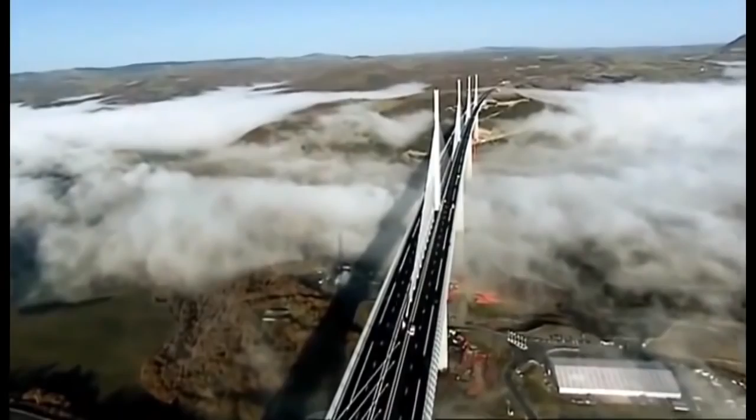And architect Lord Norman Foster's achieved his aim to give the driver the sensation of soaring. As you leave these plateaus, you do fly. You fly across this bridge. Literally, you are above the clouds. And the result certainly pleases the man who dreamt it all up. To see erected this bridge, which I imagined 15 years ago, it's something magic. This is the longest pure cable stay bridge in the world, the tallest roadway in the world, and of course at 343 meters, it is the tallest bridge ever constructed.